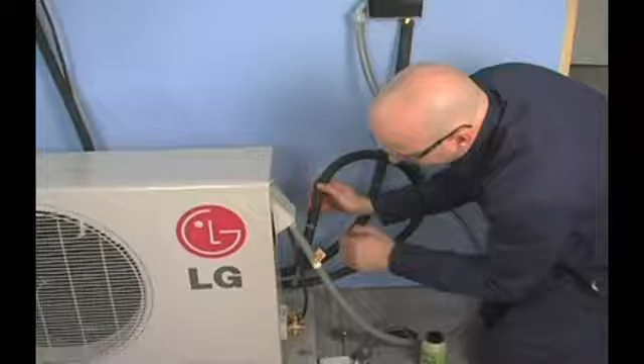Welcome to LG Electronics single-split air conditioning installation procedures. Installing the system right the first time ensures great performance and long life from the very start. Let's begin with tools and materials needed to successfully install an LG ductless split air conditioner.

You'll need the following equipment: digital multimeter, micron gauge, vacuum pump, digital charging scale, EPA-approved recovery equipment rated for R410A, manifold gauge set approved for R410A use, refrigerant leak detector, nitrogen tank and regulator.

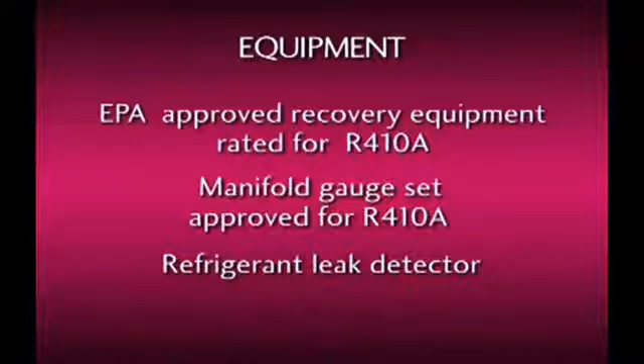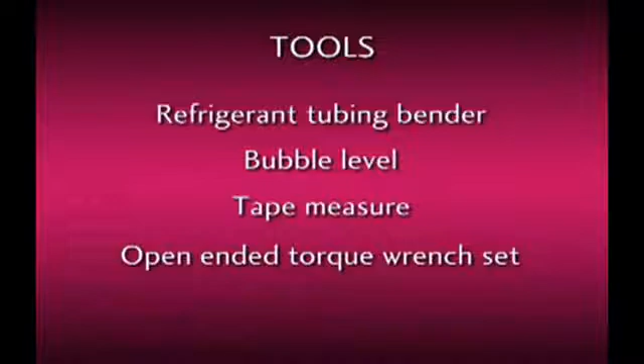And the tools you will need include a number 2 Phillips screwdriver, a 5/16 R410A access port adapter, a 4mm hex wrench, flaring tools, refrigerant tubing bender, a bubble type level, tape measure, open-end torque wrench set for tightening flare nuts, core drill and bit capable of boring a 2 3/4 inch hole. Now we're ready to begin the installation process.

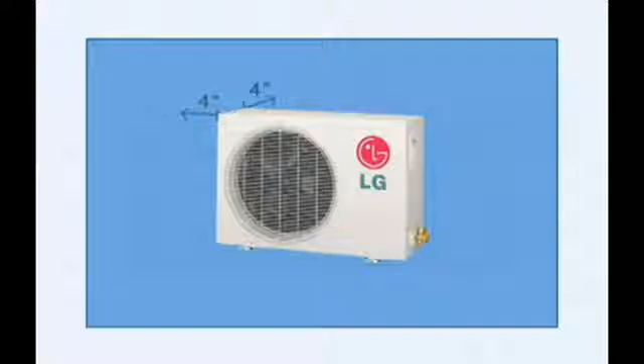Take a survey of potential installation locations on the job site. Placement of the condensing unit must be within the model-specific limits. The clearance for the indoor evaporator should be a minimum of 12 inches on either side, no less than 4 inches from the ceiling, and 7.5 feet from the floor. The clearance of the outdoor condensing unit must be no less than 4 inches from the back and left sides, 24 inches from the right side, and 28 inches from the front of the unit.

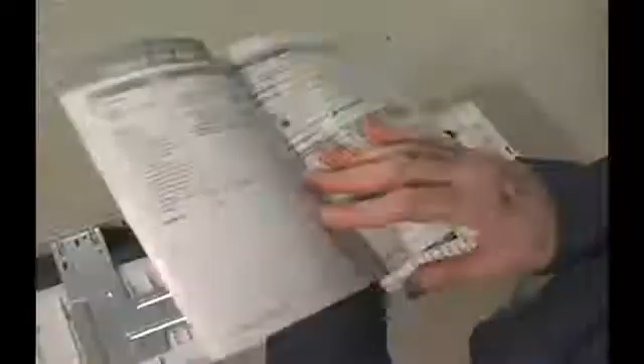Now it's time to unpack and inspect the equipment. The indoor and outdoor units come in separate cartons. Make sure the model numbers on both the indoor and outdoor unit boxes match. Remove the indoor unit from its container and packing. As you do this, check the unit for any damage. Locate the packet of installation instructions and review the installation steps before proceeding further. Take your time. It will pay off in the long run.

Remove the wall bracket from the back of the unit and set it aside. Next, remove the Phillips head screw from the plastic tubing retainer and remove the retainer from the rear of the unit. After making sure there's no damage, set the indoor unit aside.

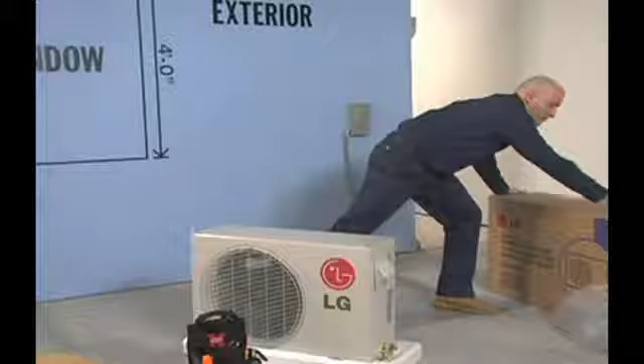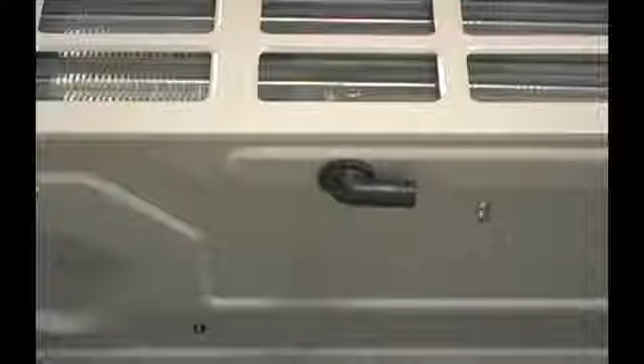After unboxing the condensing unit, set the rubber mounts aside and locate the 90-degree defrost drain adapter. The adapter must be installed on heat pump models when the unit will be mounted on a wall bracket. This will allow for a 5/8 drain hose to be attached. Now that you've confirmed that the system is free of visible defects, you can begin installing the system.

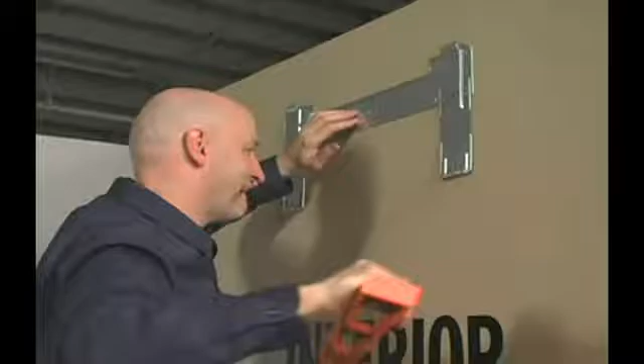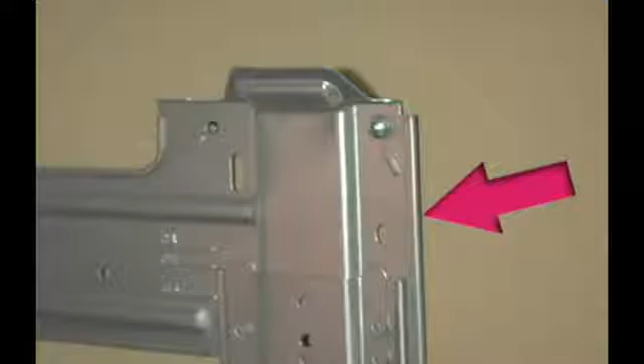Position the wall plate where the unit will be mounted. Using a level, mark off where the bracket will be mounted. Be sure to use enough wall anchors to hold the unit securely. The bracket must not bow away from the wall at the latch points of the evaporator rear chassis. Using the table in the installation manual, mark off where the wall penetration will be made. Remember to angle the penetration downward for proper condensate drainage.

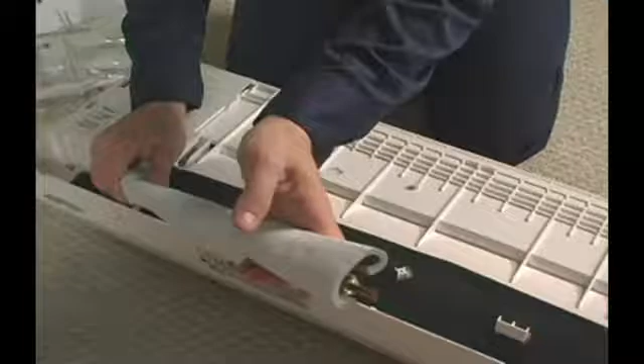Now it's time to bend the refrigerant lines. Exercise care in bending the tubing. If you're doing a surface mount, use one of the 3 knockouts. A coil spring bending aid is installed on the suction line at the bend to assist you in making this adjustment. Position the black drainage plug on the side that will not be used for drainage. Using needle nose pliers, spread the clamp and attach the drainage tubing.

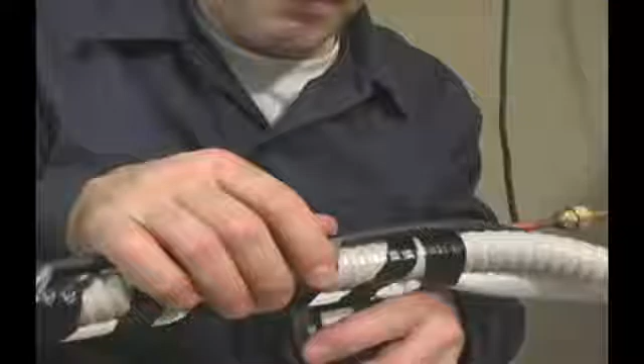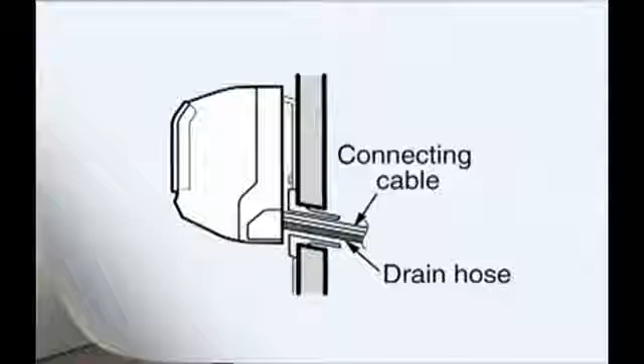The 18-4 conductor communication cable should be fed through the wall penetration and looped inside the indoor unit for connection later. Bundling the refrigerant lines, communication wire, and drainage tube will help make insertion through the wall easier. Bundle the drain line below the other lines. Proper drainage is dependent on gravity. Take care in guiding the refrigerant and drain lines through the wall penetration. It's always better to have flare connections away from the back of the indoor unit for easier connection and leak detection.

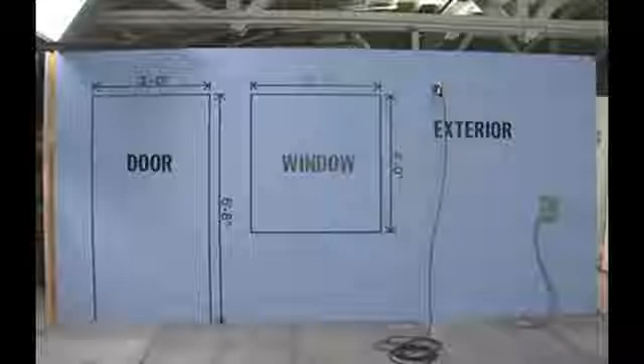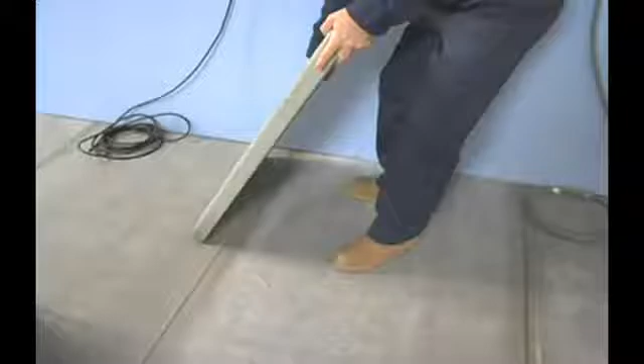Let's head outside to install the condensing unit. The condensing unit can be mounted in one of 3 ways. It can be pad mounted, bracket mounted, or rooftop mounted. For the purpose of this video, we will focus on a pad installation. Position the pad outdoors. Install the rubber grommets on each of the 4 feet of the outdoor unit, and anchor the unit to the pad.

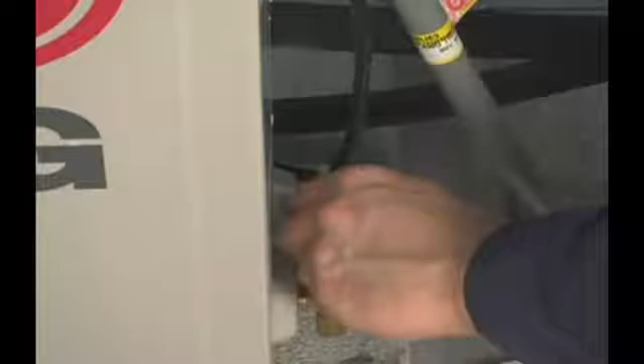Now you can remove the flare nuts from the service valves. These may be discarded if you plan to use prefabricated line sets. Otherwise, these nuts can be flared onto the lines that will be connected to the system.

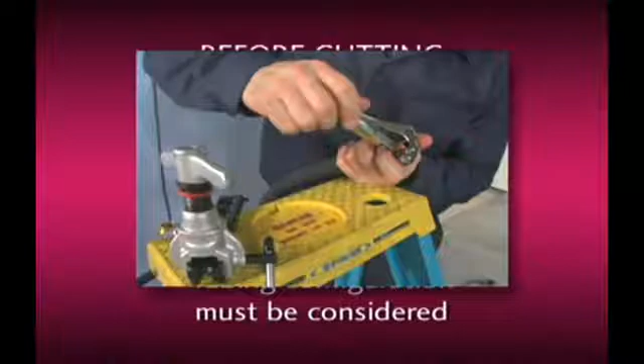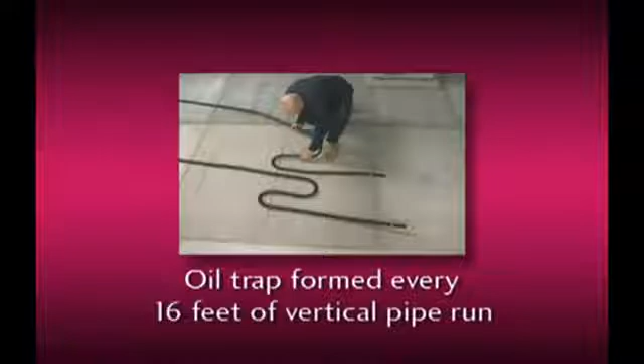Before you cut, the tubing configuration must be considered for proper oil return to the compressor. Remember the following points. An inverted trap must be installed directly exiting the service valves of the condensing unit. An oil trap must be formed in the refrigerant lines every 16 feet of vertical pipe run. Once the tubing has been cut, deburr the end and position the tubing to prevent filings from entering the tubing and contaminating it. Using good quality flaring equipment is vital.

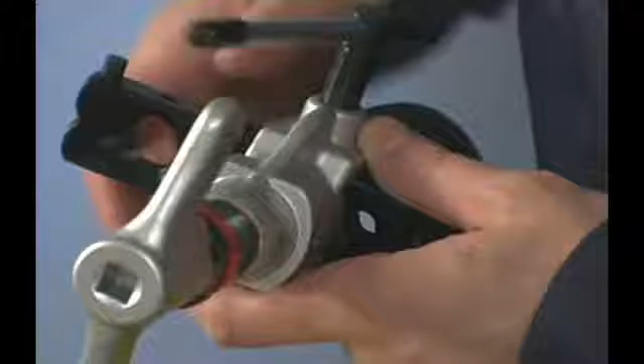Follow the directions of the manufacturer of your particular tool. Connect the refrigerant tubing, and using a torque wrench, tighten the flare nuts to the torque specification outlined in the installation manual. Remember to use the second wrench to back up the tightening process. Connect the refrigerant lines to the unit.

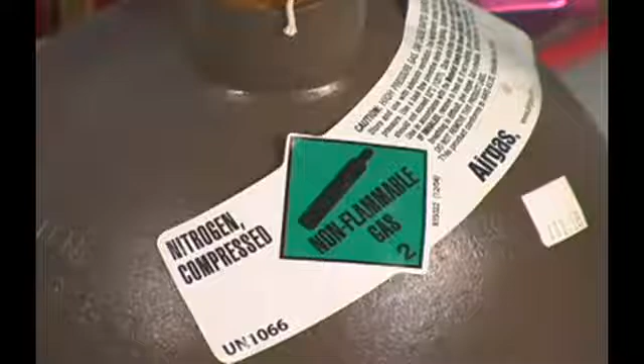Next, perform a leak check on the system. Connect a nitrogen bottle with the safety regulator to the service valves of the condensing unit. Pressurize the system to 150 psi-G and let it stand while the electrical connections are completed. This way you can come back to leak check after finishing the necessary wiring.

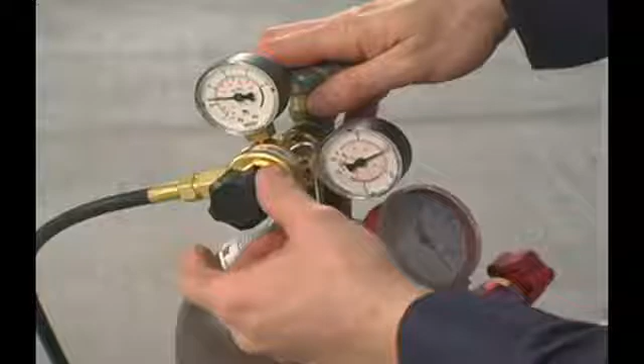Wiring the unit is quick and easy. Remove the rain-tight electrical connection cover, setting it and the screws aside. Connect the low-voltage wires in accordance with all applicable electrical codes. Move indoors to install the 4 low-voltage wires on the evaporator unit.

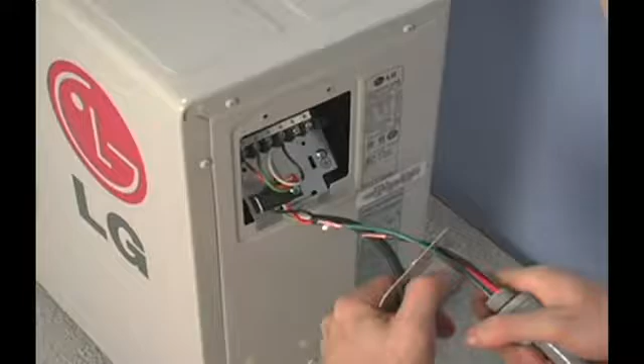Go back outside and connect the 3 high-voltage wires, making certain that the unit is properly grounded. Be sure to connect the high-voltage power supply in accordance with the local and NEC electrical codes. Leave the disconnect in the off position.

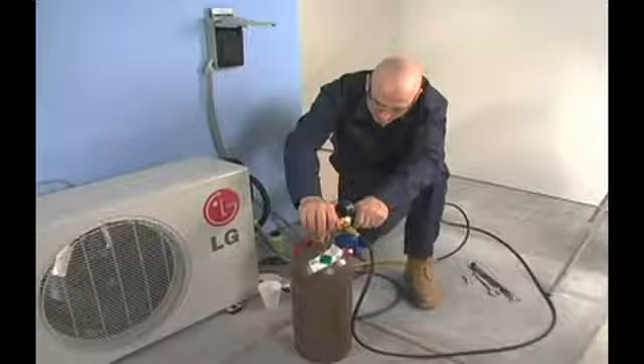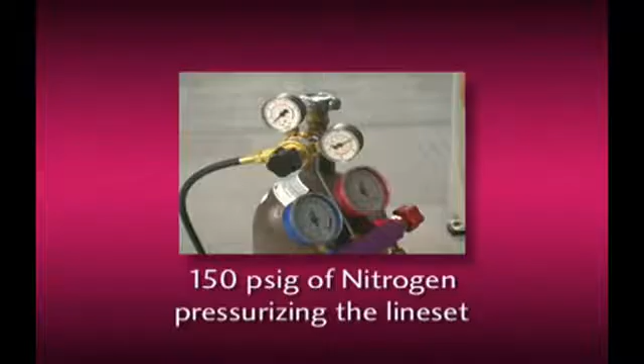Now it's time to prepare the unit for charging and system startup. Use bubble solution on flare connections to check for leaks. There should still be 150 psi-G of nitrogen pressurizing the line set and evaporator coil. After confirmation that the system is leak-free, the nitrogen can be purged via the service valve gauge port.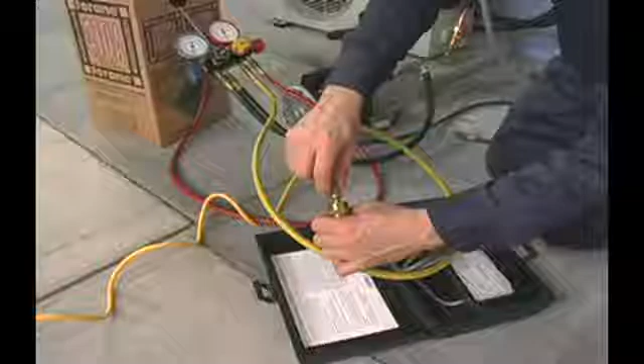Your vacuum pump should have fresh oil in its reservoir and be capable of creating a deep vacuum. Connect the vacuum pump and micron gauge to the condensing unit through the manifold gauge set and begin evacuating the system. The pump should draw the system down to at least a 500 micron vacuum within 3 to 5 minutes. This may take longer if the system has a maximum length of pipe connected to it.

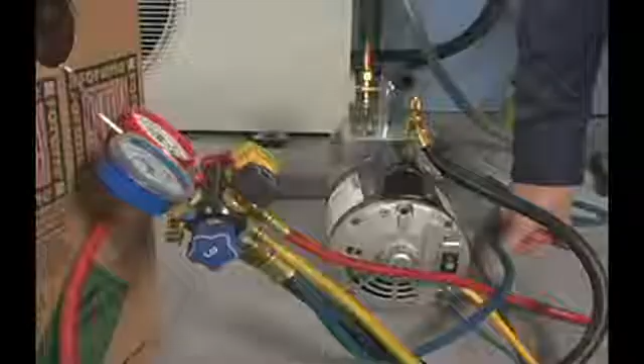Allow the pump to operate at 500 microns or less for 30 minutes. Blank off the pump valve and observe the micron gauge. A small amount of drift can be expected. If the value does not exceed 1,000 microns after 10 minutes, evacuation is complete.

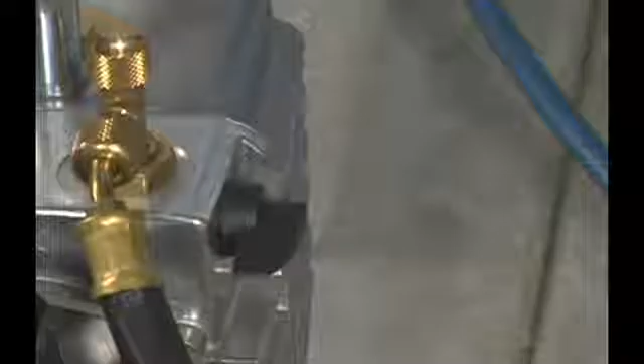If, however, the value exceeds 1,000, reopen the vacuum pump blank-off valve and run the pump for an additional 30 minutes. Observe the micron gauge again. If the micron value still exceeds 1,000, suspect a leak at one of the connections. The leak must be found and corrected before refrigerant can be introduced into the system.

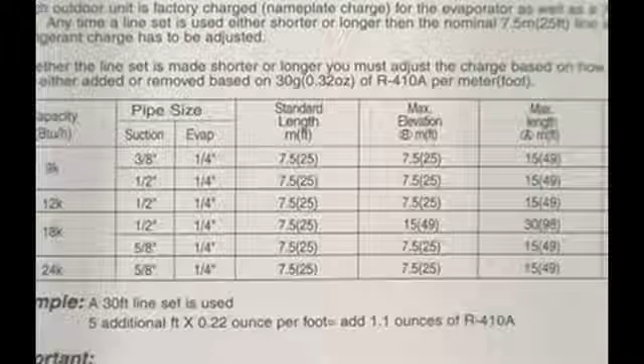The condensing unit is shipped with a refrigerant charge sufficient for 25 feet of line set. If your particular installation is more or less than 25 feet, a charge adjustment must be made. This must be handled as a critical charge adjustment. The multiplier of 0.22 ounces per foot must be applied. The amount must be added to line sets over 25 feet and subtracted from lines less than 25 feet.

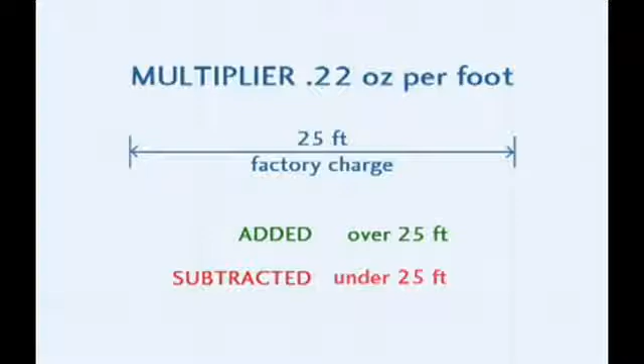The example given in the manual assumes a line set length of 30 feet. This value is 5 feet more than the factory charge, and 1.1 ounces of refrigerant should be added. But if the line set is less than 25 feet, the amount must be subtracted from the equation. In this case, 1.1 ounces of refrigerant should be reclaimed from the unit.

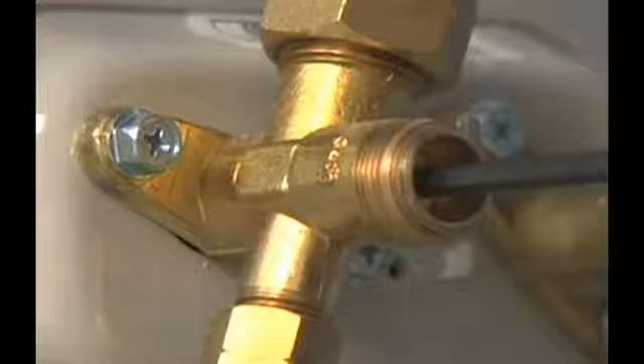To accomplish this, remove the valve caps from the service valves to access the valve stem. Back seat the front-seated valves by using a 4 mm hex wrench. Reinstall the sealing valve caps to prevent refrigerant leaks. The system must now be started. Energize the outdoor disconnect. Then move indoors to turn the system on.

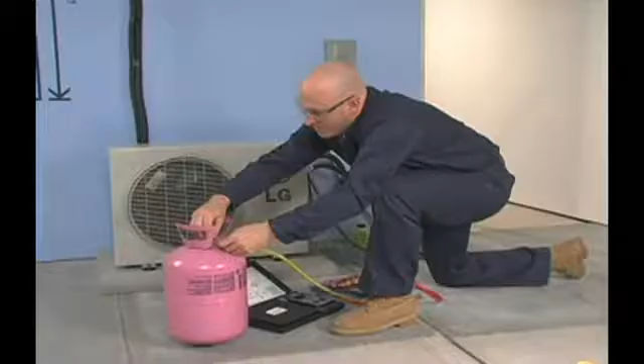Now we can finish the job by balancing the refrigerant charge. Let's finish the book example of 30 feet of line set. You can now make the 5-foot adjustment by multiplying 0.22 ounces times 5 feet, which equals 1.1 ounces of refrigerant that you must now weigh into the system.

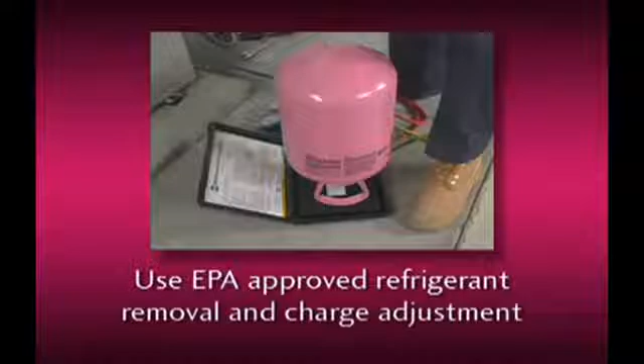R410A is a blend and must be charged in its liquid form. Also, use approved EPA practice for refrigerant removal and charge adjustment for line sets less than 25 feet in length, and while adding refrigerant for line sets longer than 25 feet.

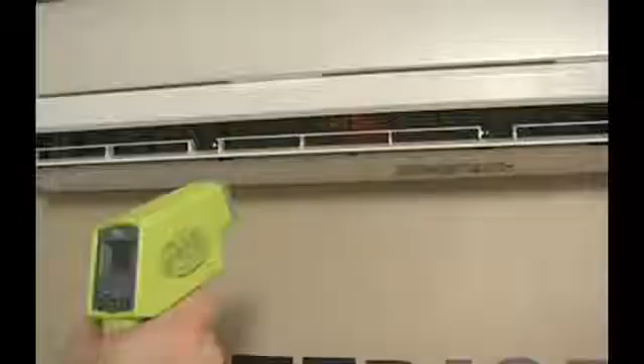Move to the indoor unit and use the remote control to select the cooling temperature. For heat pump units, after cooling verification, select the heating mode and confirm correct heating operation, as well as the ancillary functions such as chaos and sleep modes. The unit is now ready to be put into service. Please remember to turn over the installation and owner's manuals to the customer for future reference.

Installation of single-split air conditioning systems can be done expertly and efficiently if you follow these steps. Site the installation correctly. Unpack and inspect both units. Install the interior unit according to direction. Install the exterior unit as instructed. Wire the power according to code. Check for leaks with a micron gauge. Evacuate and charge the unit with the exact amount of refrigerant.